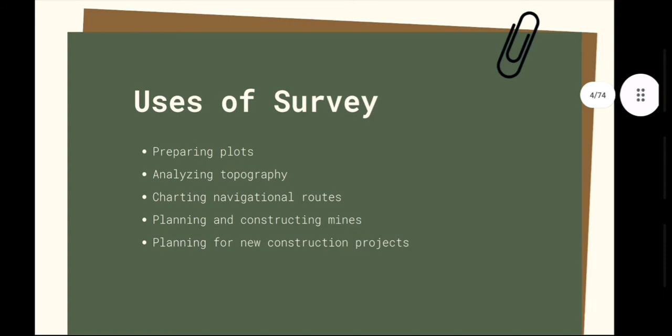assessing and recording the boundaries of different properties to determine land ownership, analyzing topography, assessing the position of existing structures like highways, canals, dams, and bridges, planning and constructing mines, preparing for military operations and engagements, and charting navigational routes.

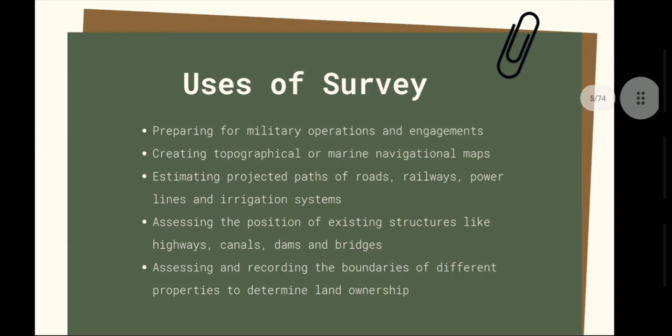Next is the types of surveying. First one is land surveying. Land surveying involves measuring and determining property boundaries. Property boundaries are the basis for all property transactions, including buying, selling, mortgaging, and leasing.

Next is mining surveying. Mining surveying involves planning, construction, and operation of various types of mines. These mines may be open cut or underground. Types of mines include coal, metalliferous, and mineral sands. Next is hydrographic surveying.

Hydrographic surveying involves undertaking measurements under the surface of the sea, harbors, and rivers, and on the adjacent shores. Their measurements are used to prepare charts of waterways and the sea, for use by ships and boats to ensure a safe passage, and for the design of infrastructure such as docks and jetties on ports and harbors.

Next is geodetic surveying. Geodetic surveying involves undertaking very precise measurements to determine the shape and size of the world and track the movement of continents. Their measurements are used in the monitoring of sea level rise, earthquakes, and the tracking of satellites.

Next one is topographic. Topographic is about defining the location and heights of any number and variety of features on a site. Topographical plans can show contours along with the physical features located. This type of survey is regularly used when designing for roads, buildings, extensions, and other new infrastructure.

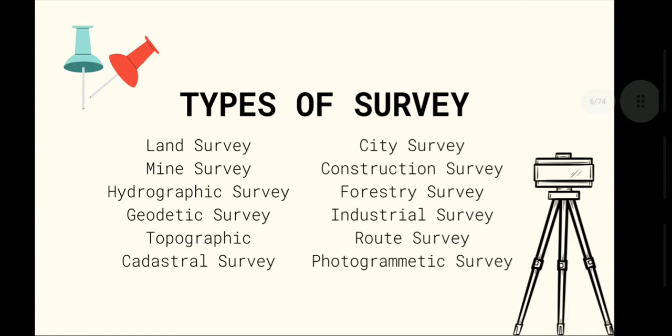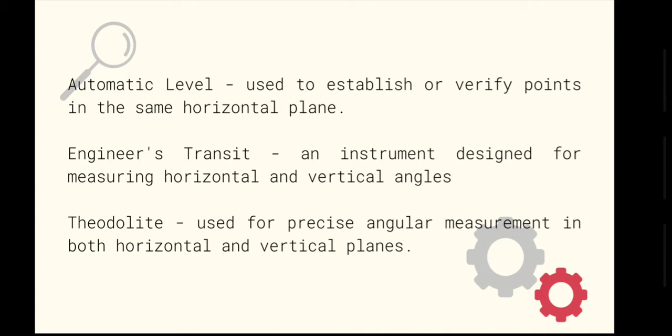Surveying instrumentation. Automatic level. Automatic level is used to establish or verify points in the same horizontal plane. Engineer's transit. It is used for measuring horizontal and vertical angles. Theodolite. Theodolite is used for precise angular measurement in both horizontal and vertical planes.

Total station. Total station is useful for measuring horizontal angles, vertical angles, and distance. Steel tape. Steel tape is used in surveying to measure horizontal, vertical, and slope distances. Rangefinder. It is used to measure the distance from the instrument to a selected point or object.

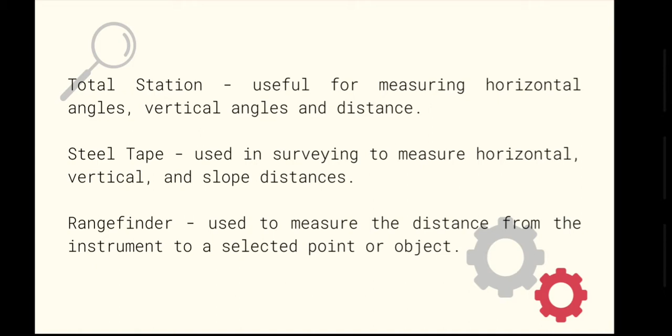Plumb bob. Plumb bob is used to make sure that the constructions are plumb, but it can also be used in surveying to establish the nadir with respect to gravity at a specific point. Leveling rod. Leveling rod is used to measure vertical distance, which is the difference in elevation between a line of sight and the required point above or below it.

Range poles. They are used to mark areas and to set out straight lines in the field. They are also used to mark points which must be seen from a distance, in which case a flag may be attached to improve the visibility. Survey markers. Survey markers are used to mark specific locations, which can be done with a nail that permanently attaches it to the ground or surface.

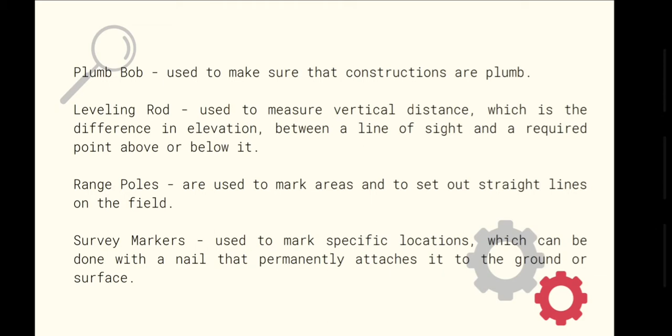I'm Helge Friedhuis, and in this section I'll be talking about care and handling of instruments. Surveying equipment tends to be fairly fragile. That is why it is critical to maintain them regularly to ensure accurate calibration, proper function, and to prevent future repairs or replacements. Use the carrying case for storage and transport.

Now we should always remember that the level should always be kept in the box when not used. For transporting the surveying equipment, always properly place the land surveying instruments in storage cases before transporting. Just because land surveying instruments are properly placed in storage cases, it does not mean that you can handle the case roughly. The case and instrument should never be dropped or impacted, because anytime you knock them around or drop them, they have a chance of getting knocked out of calibration, so it won't produce accurate results anymore.

And for the handling of the surveying equipment in open spaces, the level may be carried on the shoulder, preferably in a vertical position. The spindle should be clamped slightly so that the telescope does not rotate when carried, and it must be in full view of the person carrying it. This is to avoid hitting into trees and underbrush.

And for the handling of the surveying equipment in densely forested areas, the level should be cradled between the arms and held close to one's left or right chest. And the spindle should be unclamped. This is to allow the telescope to turn freely and give way readily to any pressure or possible collision with an object.

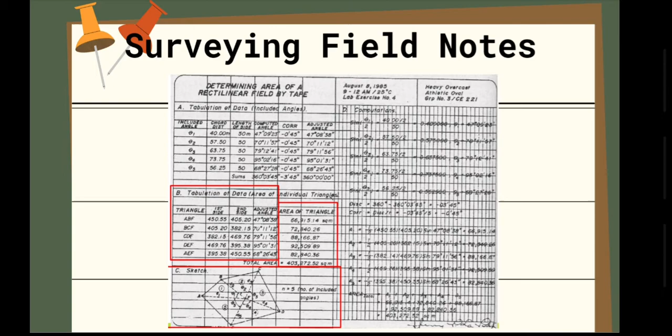Now in this section we are going to talk about the different positions and duties of each member of the survey party. First up is the chief of party, the person who is responsible for the overall direction. This includes the supervision and operational control of the survey party. Next is the assistant chief of party. This person assists the chief of party in the accomplishment of the task assigned to the survey party.

Instrument man is the person who sets up, levels, and operates surveying instruments such as the transit, engineer's level, theodolite, plane table, etc. The technician is responsible for use and operation of all electronic instruments required in a fieldwork operation. The computer is the person who performs all computations of survey data and works out necessary computational checks required in a fieldwork operation.

Recorder is the person who keeps a record of all sketches, drawings, measurements, and observations taken or needed for a fieldwork operation. The head tapeman is the person responsible for the accuracy and speed of all linear measurements with tape. The rear tapeman is the person who assists the head tapeman during taping operations and in other related work. Flagman is the person holding the flagpole or range pole at selected points as directed by the instrument man during operation.

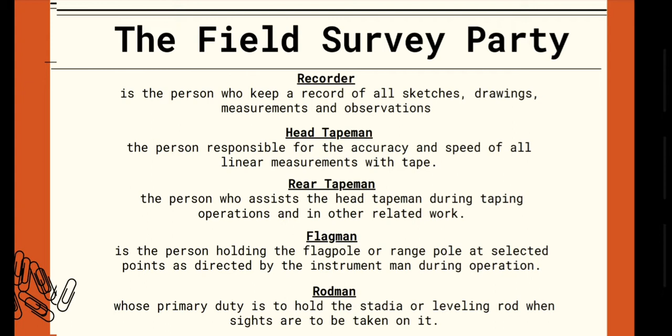The rodman's primary duty is to hold the stadia or leveling rod when sights are to be taken on it. The pacer is the person who checks all linear measurements made by the tapeman. Axeman or lineman is the person whose duty is to clear the line of sight of trees, bush, and other obstructions in wooded country. Aidman is the person whose duty is to render first aid treatment to members of the survey party in cases involving their health, safety, and well-being.

Lastly, the utility men are the persons whose duties are to render other forms of assistance needed by the survey party. Accuracy of measurements.

Direct versus indirect measurements. First is the direct measurements. The key word is direct, so this is a simple method in which the value of the quantity to be measured can be obtained directly without any calculations needed. So it is a quantity that can be measured directly, and the examples are weight and length.

Next is the indirect measurements. In the indirect method of measurement, the value of the quantity to be measured is obtained by measuring other quantities which are functionally related to the required value. So it normally involves properties pertaining to trigonometry and geometry. An example would be using an instrument called a sine bar in order to measure the angle of an object in which it won't directly display its value.

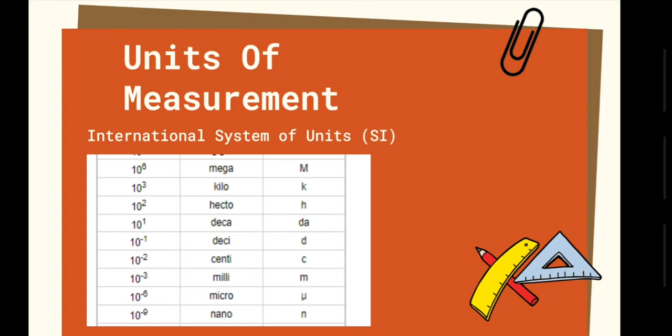Next would be linear, area, and volume measurements. The common units for length are kilometer, meter, centimeter, and millimeter. The unit of area in SI is the square meter. The following are the commonly used relationships. 1 hectare equals 10,000 square meters. 1 are is equal to 100 square meters. 1 square kilometer is equal to 1 million square meters, and it would be equal to 100 hectares. The common metric units for volume are the cubic meter, liter, and milliliter.

Lastly is the angular measurements. So the SI unit for plane angles is the radian. And we should also take note of the conversion between radian and degrees, which is 2 pi rad is equal to 360 degrees. In the Philippines, the sexagesimal units are used with SI because of their practical importance and our familiarity with it. So in the sexagesimal units, the angle is measured in degrees, minutes, and seconds. On the other hand, in the centesimal units, the angle is measured in grad. And note that the circumference of a circle is divided into 400 grads.

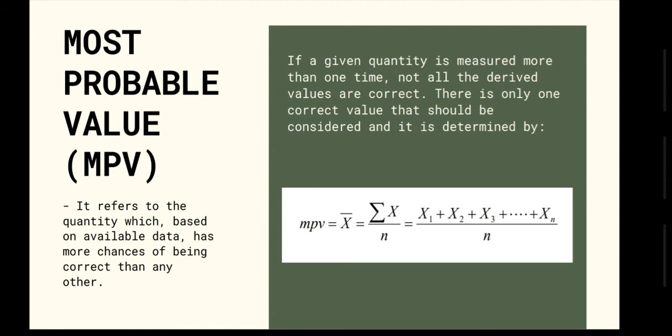MPV is equal to the mean, which is equal to the sum of all values divided by the number of values given. So basically, to better understand the most probable value, it is the mean. You can call it the mean. So here we have a given problem set.

A surveying instructor sent out 6 groups of students to measure a distance between 2 points marked on the ground. The students came up with the following 6 different values: 250.25, 250.15, 249.90, 251.04, 250.50, and 251.22 meters.

Assuming that these values are equally reliable and that variations result from accidental errors, determine the most probable value of the distance measured. So we know that the most probable value is the mean. So we will use the formula of the mean. So we will first sum up the values given, and then divide it by the number of values available.

So the summation of all of the values given is 1503.06, divided by the number of values, which is 6, and so the final answer would be 250.51 meters. So now we'll move on to the second sample problem.

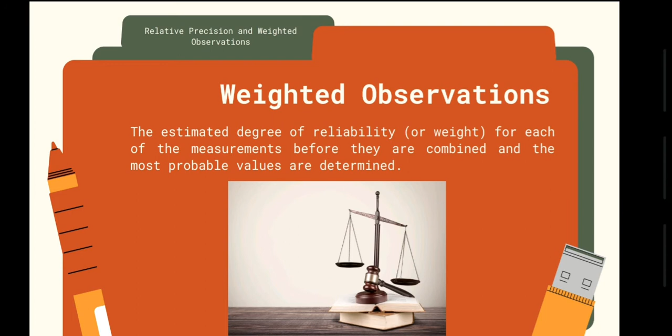Lastly is the weighted observations. So the weighted observations are the estimated degree of reliability or weight for each of the measurements before they are combined and the most probable values are determined. So here we have a sample problem for our weighted observations.

4 measurements of a distance were recorded as 284.18, 284.19, 284.22, and 284.20 meters, and given weights 1, 3, 2, and 4 respectively. Determine the weighted mean. So we will be using the formula for the weighted mean.

So here, all the x sub i's denote data points or the given values, while the w sub i denotes the weight. So the sum of the products of all the weights and the data points divided by the sum of all the weights will give us the weighted mean. So plugging in all of the values, we get the final answer, 284.20 meters.

Measurement of distances. The accurate determination of the distance between 2 points on any surface is one of the basic operations of plane surveying. In surveying, the distance between 2 points is understood to mean the horizontal distance, regardless of the relative elevation of the 2 points. There are several methods of determining distance. The choice depends on the purpose for which the measurement is intended and the required precision.

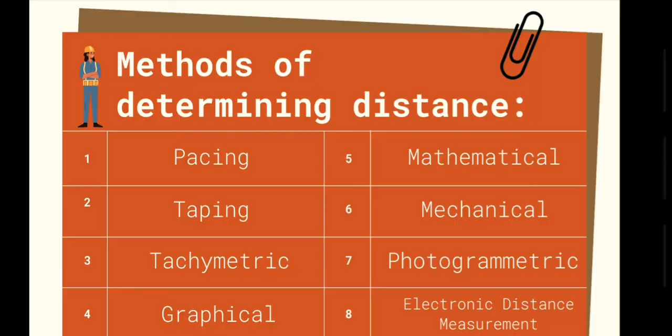In surveying, the most commonly employed methods of linear measurement include pacing, taping, tachymetric, graphical, mathematical, mechanical, photogrammetric, and the EDM or the electronic distance measurement. First is the distance by pacing. Pacing is the simplest and easiest method of measuring distance. Pacing consists of counting the number of steps or paces in a required distance. It also means moving with measured steps. We all know pace is equal to one step and stride is equivalent to two paces, which is two steps.

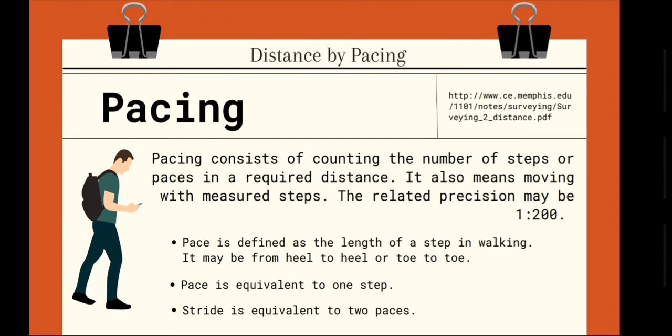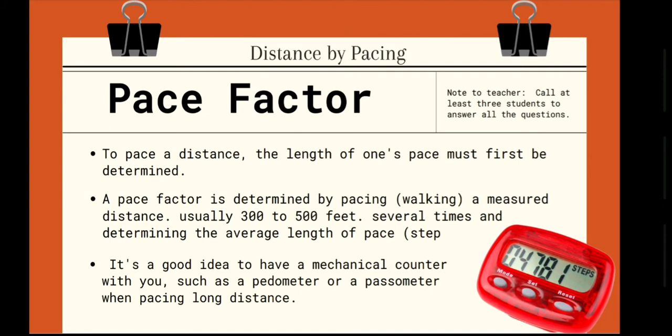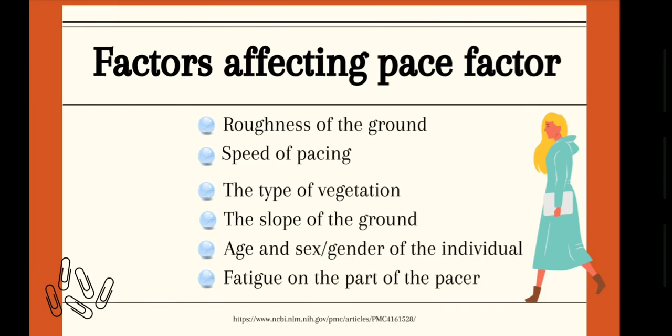It is also important to walk naturally when calibrating one's pace and in pacing distances, and care should be taken to walk in a straight line. And it is a good idea to have a mechanical counter with you, such as a pedometer or a passometer, when pacing a long distance. So there are several factors that can cause variation in pace factors, such as the roughness of the ground, speed of pacing, type of vegetation, slope of the ground, age and gender of the individual, and fatigue on the part of the pacer.

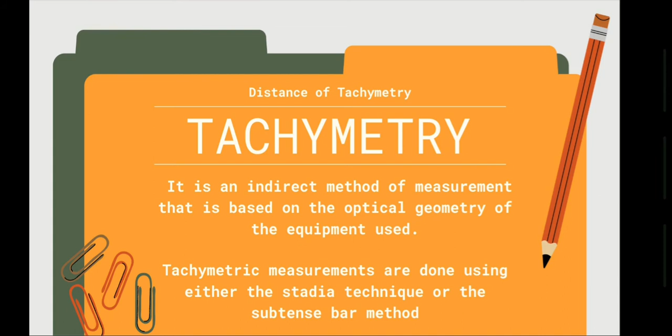Distance by tachymetry. Tachymetry is another procedure of obtaining horizontal distances. It is based on the optical geometry of the instrument employed, and it is an indirect method of measurement. A transit or a theodolite is used to determine the subtended intervals and angles on the graduated rod scale, from which the distances are computed by trigonometry. And tachymetry measurements are done using either the stadia technique or the subtense bar method.

Stadia method provides a rapid means of determining the horizontal distances. The precision of the stadia method depends on the refinement with which the instrument was manufactured, the skills of the observer, the length of the measurement, effects of refraction and parallax. The equipment for stadia measurements consists of a telescope with two horizontal hairs called stadia hairs and a graduated rod called stadia rod. The telescopes of most surveying instruments are equipped with stadia hairs, and when you look into the telescope, this is what you see.

The process of taking stadia measurements consists in observing through the telescope the apparent location of the two stadia hairs on a vertically held rod. The distance from the telescope to the rod is found by the proportional relationship in similar triangles. So the equation D = Ks + C is employed in computing the horizontal distances from stadia intervals when sights are horizontal.

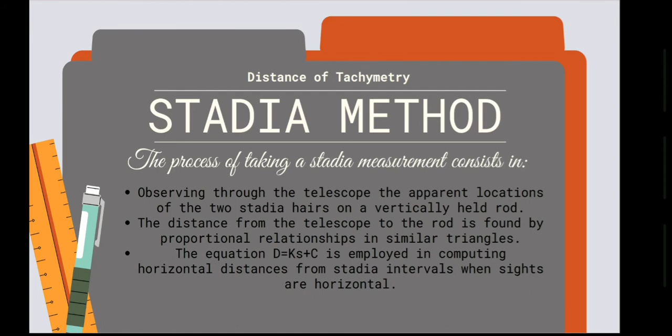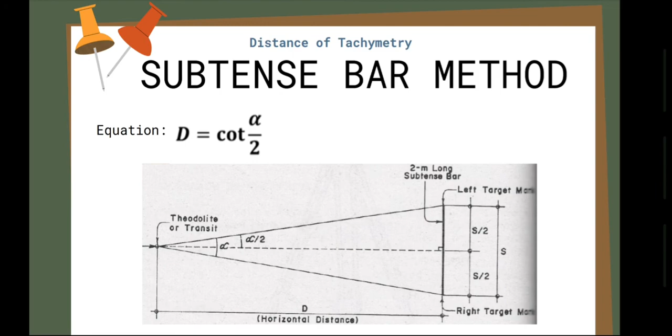subtending angles. So the equation for the horizontal distance, where your theodolite or transit is point T, to the subtense bar: to get that distance, use this equation, which is D is equal to cotangent alpha over 2. This is an illustrative problem.

Example: the following subtense angles were read on a 2 meters long subtense bar using a theodolite: 0 degrees 54 minutes 13 seconds and 0 degrees 22 minutes 20 seconds. So compute each horizontal distance from the theodolite to each position of the bar. So this vertical line here is where your subtense bar is, and the circle here is where your theodolite is, and the line here is the horizontal.

Then D1 is your first equation, which is point A, and D2 is the equation of point B to this subtense bar. So D1 is equal to cotangent of 0 degrees 54 minutes 13 seconds over 2, which is 126.81 meters. Then to compute your D2, it is cotangent of 0 degrees 22 minutes 20 seconds over 2, which is

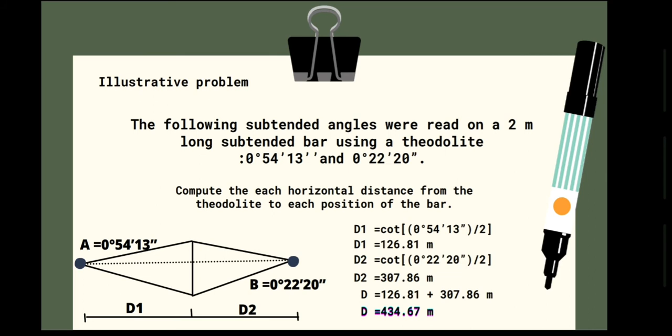307.86 meters. To compute for the whole distance from point A to point B, you have to add distance 1 and distance 2, which is equivalent to 434.6 meters.

Distance by graphical and mathematical methods. A distance may be determined through the relationship with known distances geometrically. This method is widely employed in plane table surveys and in triangulation works. In inaccessible terrain, this method becomes quite practical to employ. Distance by mechanical devices. These devices are only applicable for low precision surveys or where quick measurements are desired. The more commonly used among these devices include the odometer, measuring wheel, and the optical rangefinder.

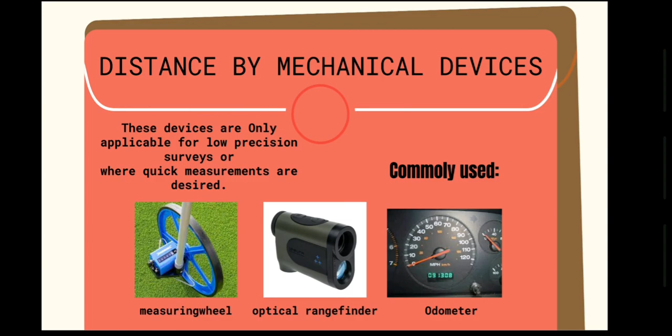So the odometer is simply a device that can be attached to a wheel for the purpose of roughly measuring surface distances. And the optical rangefinder can be used to determine distances approximately simply by focusing. So here is the distance by photogrammetry. Photogrammetry refers to a measurement of images on a photograph.

So there are two general types of photogrammetry. The aerial, with the camera in the air, and the terrestrial, with the camera mounted on a tripod. Terrestrial photogrammetry dealing with object distances up to 200 meters is also termed close-range photogrammetry.

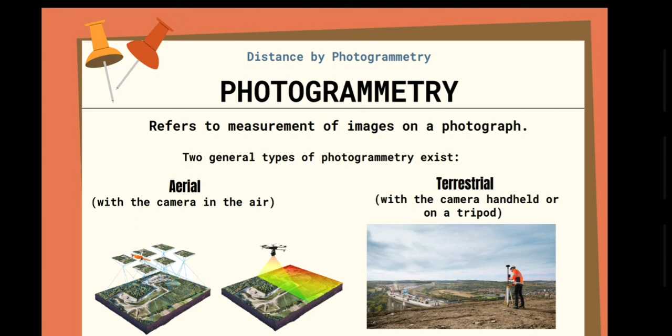Distance by electronic distance measurement, or EDM. This is a method of determining the length between 2 points using electromagnetic waves. The basic principle of electro-optical devices is the indirect determination of the time required for electromagnetic radiation to travel between two stations.

Distance by taping. Taping is the linear measurement of the horizontal distance between 2 points using a surveyor's tape. Direct measuring using a tape is the most common method of calculating distance. So the following conditions could exist during a taping operation. First is substandard lengths due to either faults in their manufacture or damage on the tape, caused by kinks, bends, cuts, and splices on the tapes.

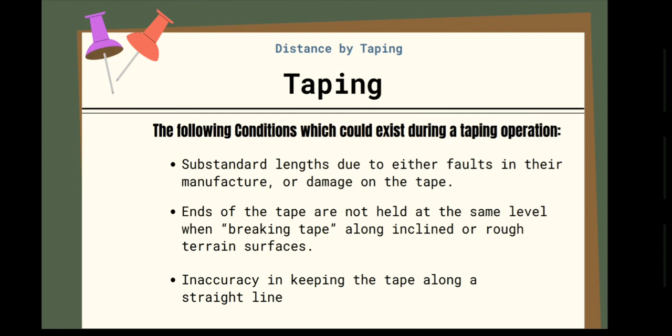Second, the ends of the tape are not held at the same level when breaking tape along inclined or rough terrain surface or when undertaking slope taping. Third is inaccuracy in keeping the tape along the straight line during the measurement or in laying out of lengths. Then here is a continuation. The tape is not of nominal length due to the difference in the temperature prevailing during the actual measurement.

Next is the shortening or lengthening of the tape due to the application of pull applied on the tape during the standardization. And lastly, the distance between the end points of unsupported length of tape is less than the specified nominal length due to the effect of a sag or a strong blowing side wind.

So, the procedure of taping. First is aligning the tape. In aligning the tape, when a line is to be measured, both ends must be marked. It may also be necessary to establish a few intermediate points to serve as guides in obtaining a straight line. So second is stretching the tape.

A steady and firm pull, generally between 4 and 7 kg, is applied on one end of the tape during stretching. Remember, no measurement should be made without stretching the tape since tapes are correct in length only when a standard pull is applied to it. And third is the plumbing.

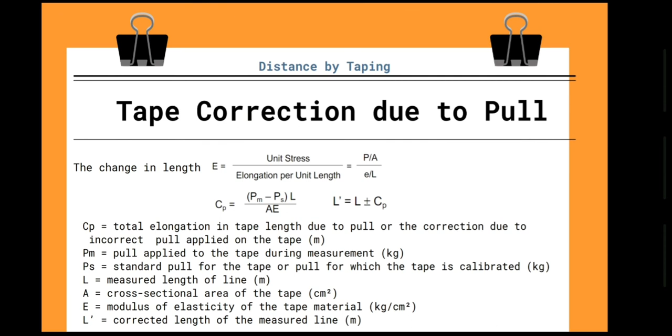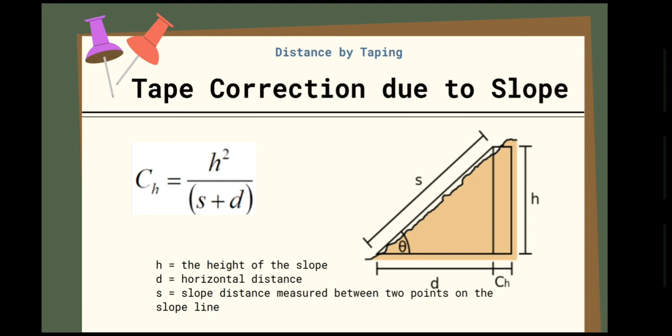And lastly, the combined tape correction. We all know that in surveying, tape correction refers to correcting measurements for the effect of slope, angle, expansion or contraction due to temperature, and the tape sag, which varies with the applied tension. Not correcting for these effects gives rise to systematic errors, effects which act in a predictable manner and therefore can be corrected by mathematical methods.